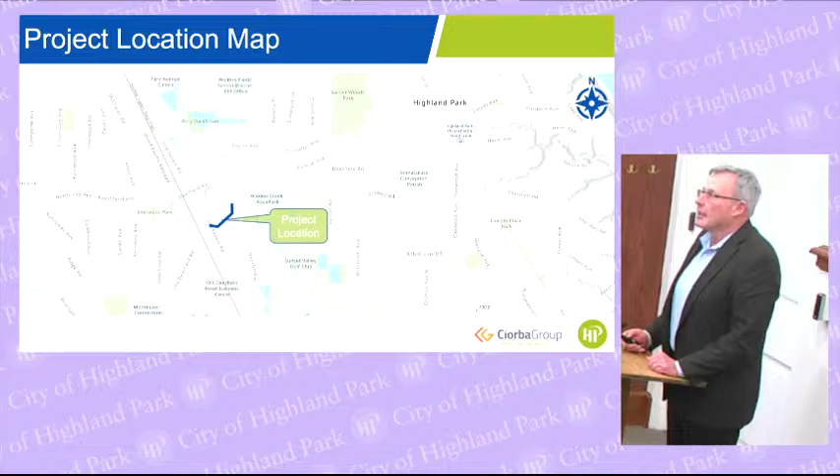As far as the project history goes, the project is located just south of Deerfield Road, or Central, depending on how you want to look at that, in Highland Park. Here's an aerial view of it, you can see what it looks like. It's a very basic bridge in this form.

The bridge itself is almost as old as I am — I'm a year older — but it was built in 1964, a reinforced concrete bridge, and it's listed as historically eligible. The city of Highland Park did not consider it to be eligible, but IDOT did say it was historically eligible. We had to go through a process called a historical analysis, known as Section 106, what IDOT calls it. We passed through all of that, and there were certain commitments made if a new bridge was constructed. There's a memorandum of agreement that was signed by the city of Highland Park, and now we're waiting for the FHWA and IDOT to sign that agreement as well.

There's nothing that's going to stop the agreement from being signed, but these were certain commitments that were made if we tore down this bridge and put up a new bridge.

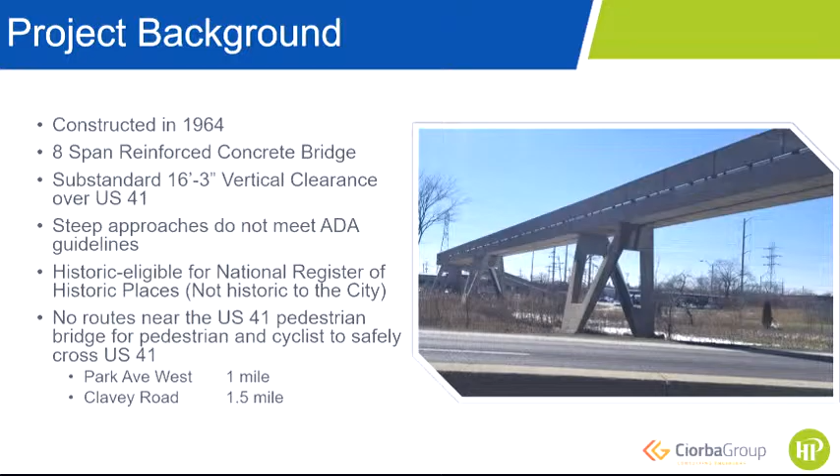There's no safe cycling or pedestrian crossing over US 41, though that depends on the user. As shown on the previous slide, Deerfield has no sidewalks, so no one can cross there. The closest crossing to the north is Park Avenue West, a mile away, and it has sidewalks, but depending on the maturity of the cyclist, it may not be desirable.

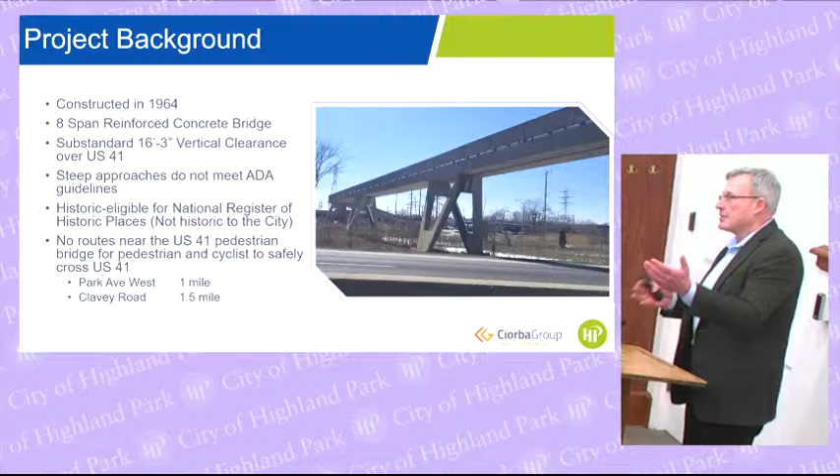Then you have Clavey Road, 1.5 miles to the south, which has sidewalks. With the recent Clavey Road project, east of that location there's now a multi-use path on the south side, but again, it's 1.5 miles from this location.

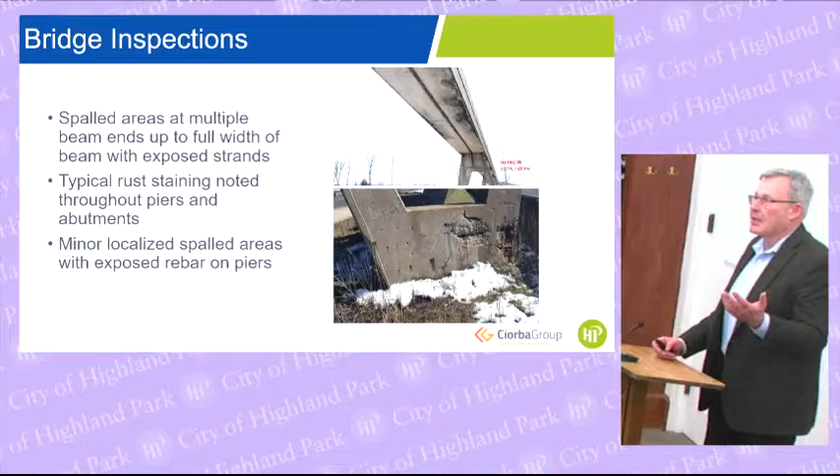The bridge itself is inspected by Ciorba Group every 2 years. The bridge deck is in the worst condition of anything. The substructure, the piers and abutments shown in that bottom picture, looks terrible, but that's actually cosmetic. When we say minor localized spall areas and exposed rebar on the piers, we mean it's minor—it can take the beating.

This portion is in the worst condition of the bridge. It's really narrow, and you can see these drains in the middle that are a maintenance nightmare—they pop up, they fail, and could be an ankle twist hazard. The drainage system is failing in a lot of locations, so water ponds there. It's really narrow and uninviting, and as a cyclist taking my bike over this, it's kind of scary.

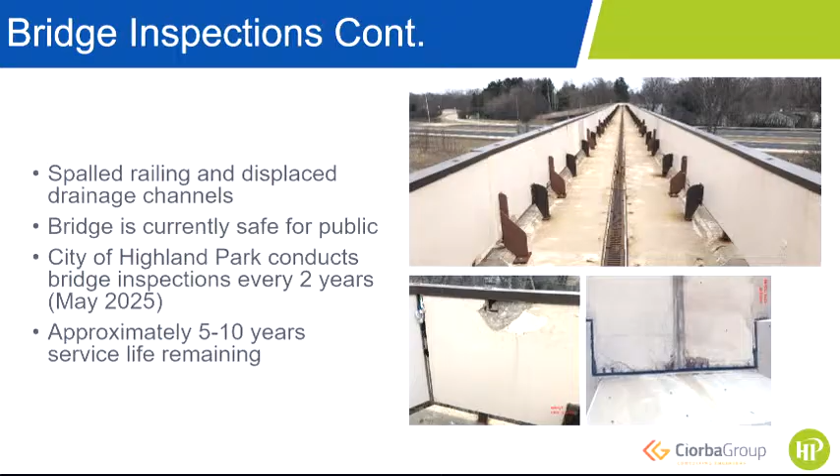We inspect this bridge every 2 years, and the last inspection was in May of last year, so it was recent. If nothing more is done—no maintenance, no repairs—we estimate the bridge could last about 5 to 10 years. It depends on what happens with the portion over US 41. If things start to spall and fall, there's potential for debris to fall on cars, so we might need emergency netting or even have to take the bridge down. But the estimate is 5 to 10 years.

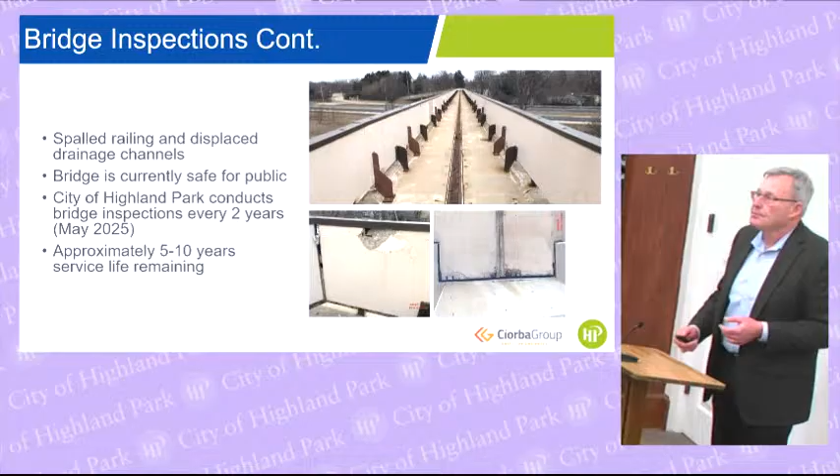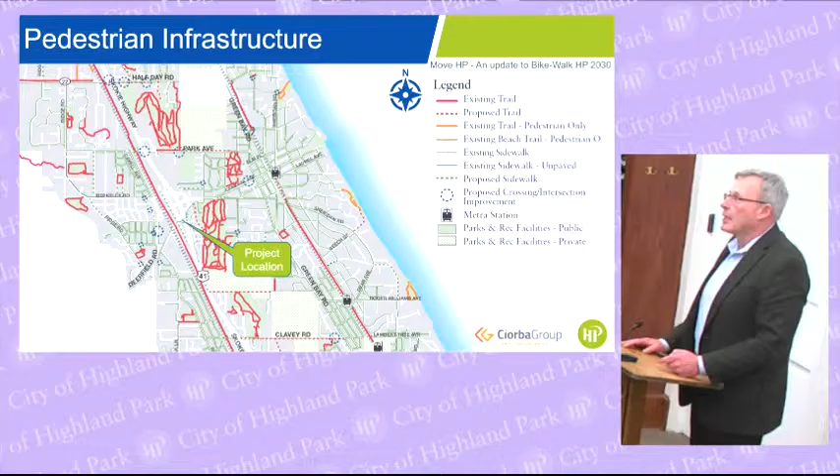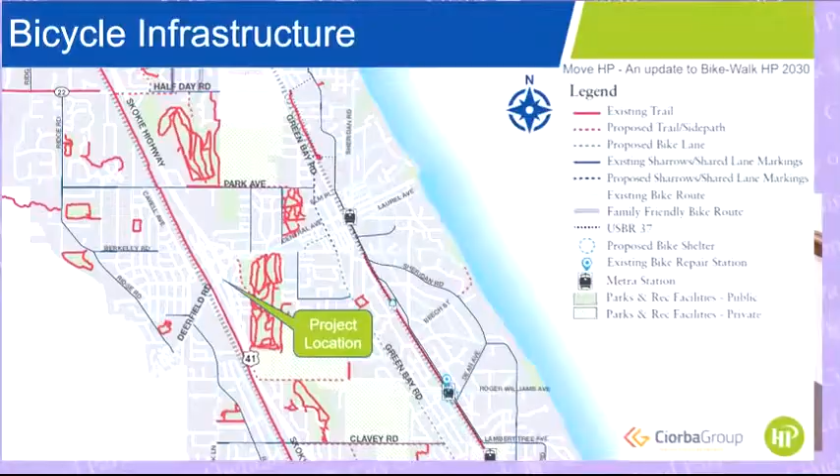Looking bigger at the infrastructure, you can see all the existing and proposed trails for pedestrians, including the bridge over US 41 providing pedestrian access. For bicycles, there's really nothing there. Clavey Road shows a dash, which has actually been built now—the trail on the south side of Clavey was constructed a couple years ago with the Clavey Road project. So there's really not a lot of connectivity on each side of 41 for bicyclists.

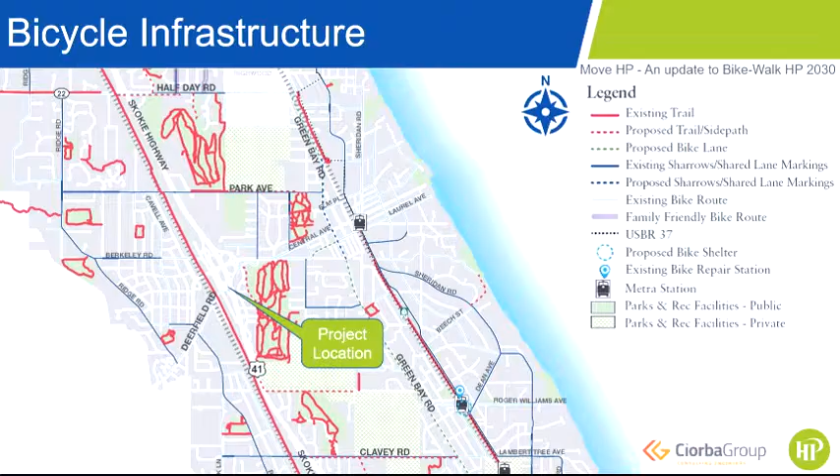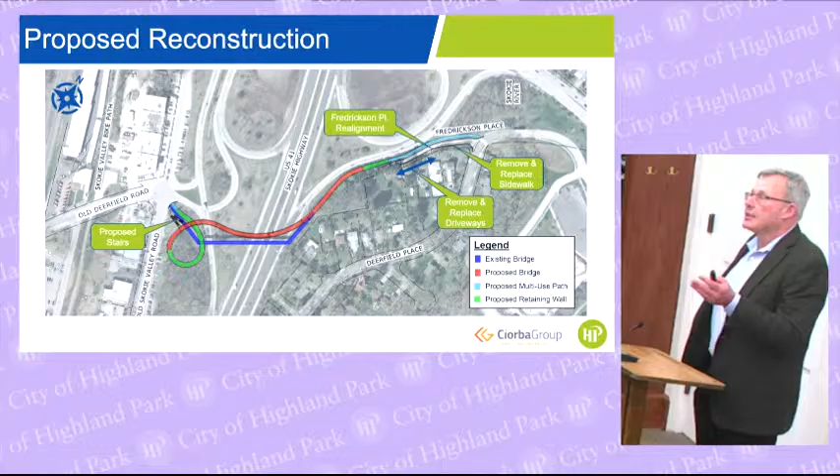As far as improvements, when we were asked what it would take to replace this bridge, here's what we came up with geometrically, which has been approved by IDOT. The bridge involves a loop ramp and a bridge structure over US 41, along with some MSE retaining walls and a touchdown at Frederickson Place. There would be a proposed sidewalk or stairs near Skokie Valley Road on the west side, and we'd also need to work with property owners on the east side because of the trail coming down in front of their house.

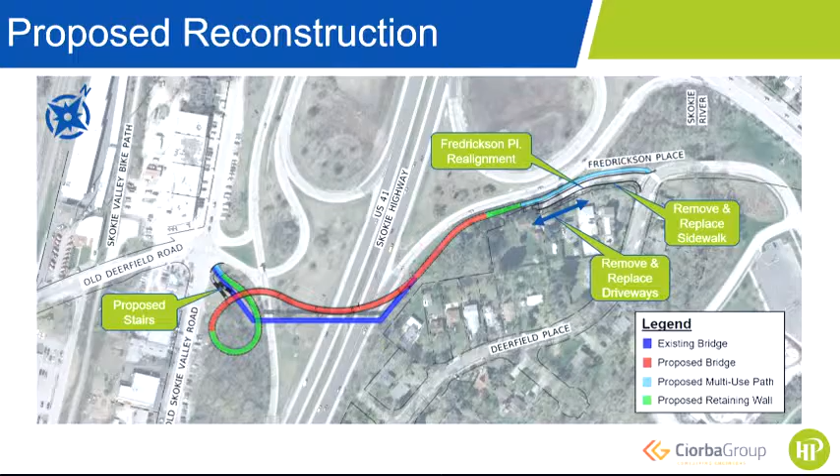The geometry is so complex because the original bridge was built very steep—a 12+% slope going up. Current standards require meeting the American Disability Accessibility Guidelines, which cannot exceed 5%, so the loop ramp and long ramp down help achieve that. Additionally, the current structure is vertically constrained over US 41 at 16 feet 3 inches, while IDOT's guidelines require 17 feet 3 inches. So not only do we have to achieve a 5% or lower slope, we also have to raise the bridge a foot higher than existing, which complicates the geometry further.

This is a real quick rendering we did to give you an impression of what it would look like on this end. Again, there would be retaining walls on the outside, and the retaining walls could be aesthetically pleasing.

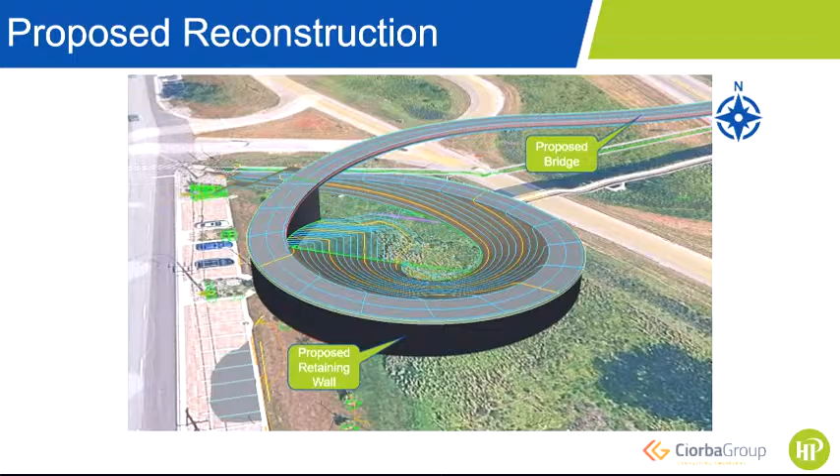As you can see, there's a lot of retaining wall options available. The inside, in order to save costs, we were going to grade it down, and it can be landscaped in that area for the users to see. And again, the bridge goes over US 41.

You can see here that the existing bridge is 6 feet — it's really narrow. But we're talking about this new bridge being 14 feet wide, which provides adequate space for bicyclists and pedestrians to commingle.

And then as I mentioned, there's the loop ramp. As an engineer, I never like designing anything to the minimum or the maximum because there are construction tolerances. That's why we designed this to 4.9%, not the 5% max I mentioned earlier.

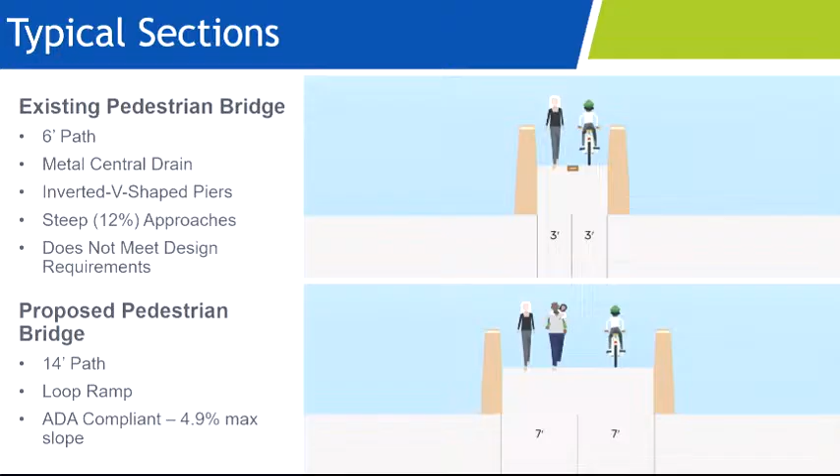We were also asked to take a look at what it would take to rehabilitate the existing structure. So we took a look at it and did a life cycle cost analysis of the bridge itself — what it would take to repair the bridge deck, which is really narrow, and where the drains are failing. We concluded it's best to just take the whole bridge deck off.

We'd construct a whole new bridge deck, and then the piers and abutments — the cosmetic work I told you about — we would repair those. So that's what it shows right here: we would put a new 10-foot wide bridge deck on there, no longer 6 feet. We could accommodate a 10-foot wide bridge deck and put on IDOT standard bicycle railing.

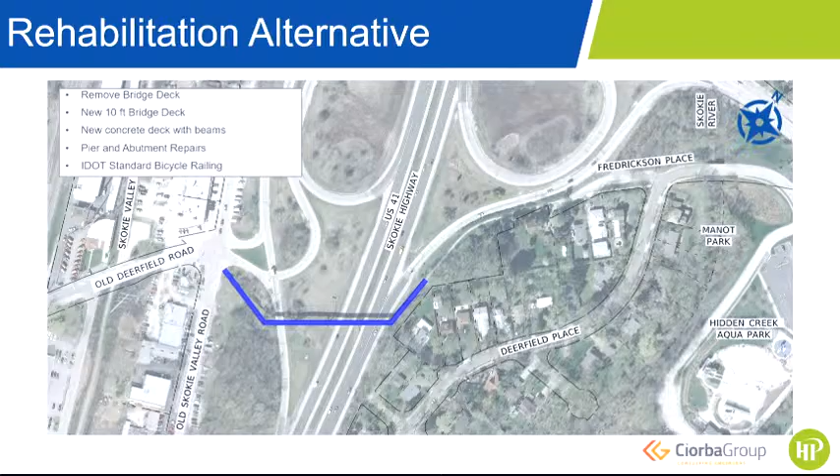The funding for that would have to be 100% by the city for the rehab, because of the grant funding — the ITEP grant funding. There's $2 million that the city was awarded for that. Because the bridge would still not be ADA compliant, the federal funding would be disallowed. And that federal funding expires on November 30th of this year.

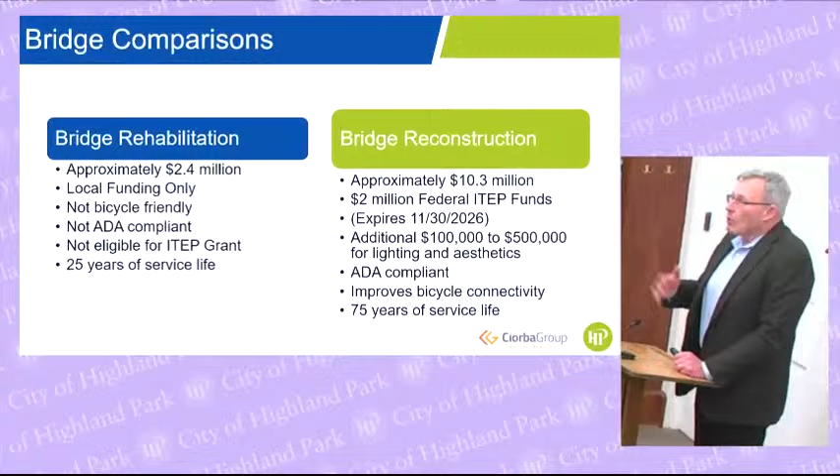The old bridge rehabilitation would not be bicycle friendly and would also not meet ADA guidelines. If we were to do that, about 25 years later you'd have to go back and revisit the bridge, probably do more inspections and repairs on the piers, abutments, and the bridge deck. By then the bridge deck will need something done to it — so about 25 years, you'd have to take a look at that.

Whereas on the other side, the bridge reconstruction is going to be ADA compliant, provide that bicycle connectivity, and offer 75 years of service life — but at a cost of $10.3 million, of which $2 million will be offset by the ITEP funding grant.

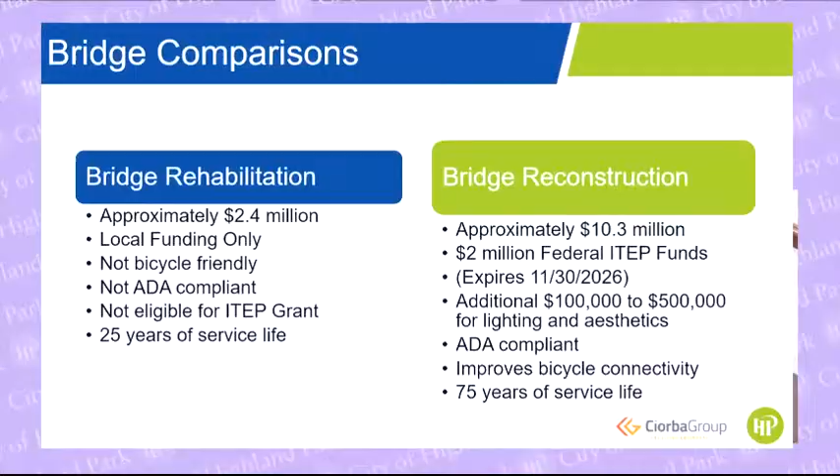The other thing is, I know the city was wanting to do some aesthetics with this because you wanted it to be a gateway, have Highland Park branding on it and things like that. So depending on how little or how much you want to do, the architect I was working with said it's a palette anywhere from $100,000 to maybe $500,000, which was the estimate we came up with.

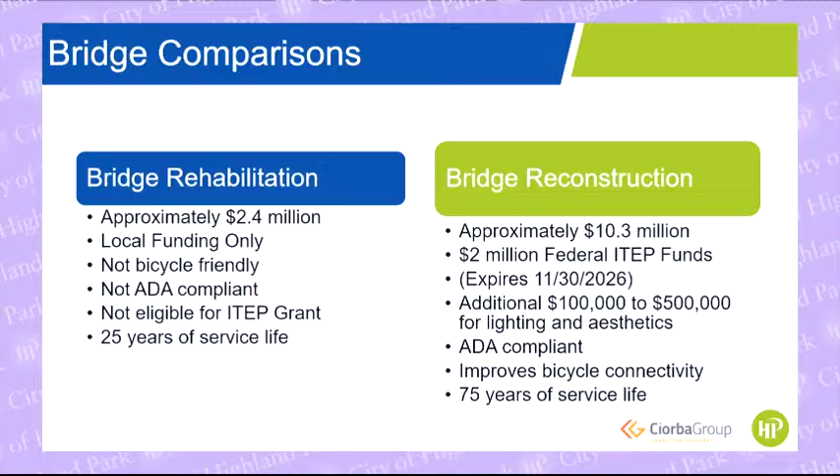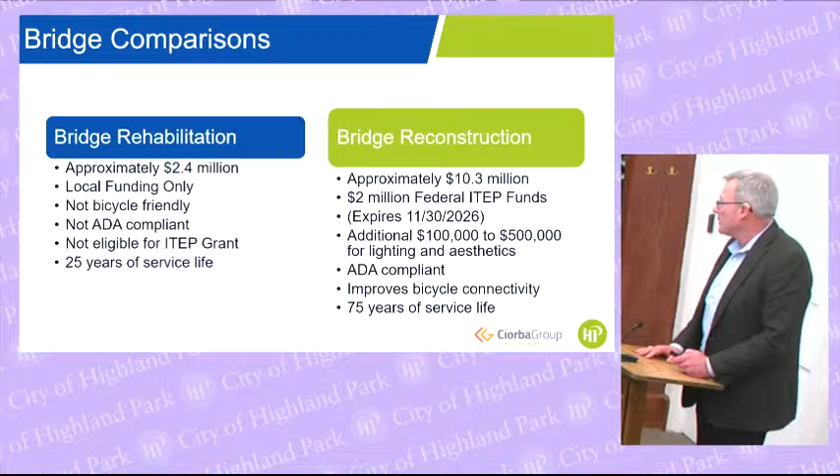The work that the architect has, because of not knowing which way the city was going to go, we have not been working on that portion. I know that if we did go this way, there would be a lot of work we'd have to do with the city as far as selecting palettes, plants, and aesthetics. We can do that if necessary.

So that's the entire presentation. I leave it to any questions that you have.

One question I had, if you could go back in terms of the 10.3 cost of construction for the new one, would that be in addition to the 2 million for engineering we have from ITEP, or would the ITEP be included in that 10.3? The 10.3 is the total cost, so your 2 million would offset that, making the city's cost 8.3.

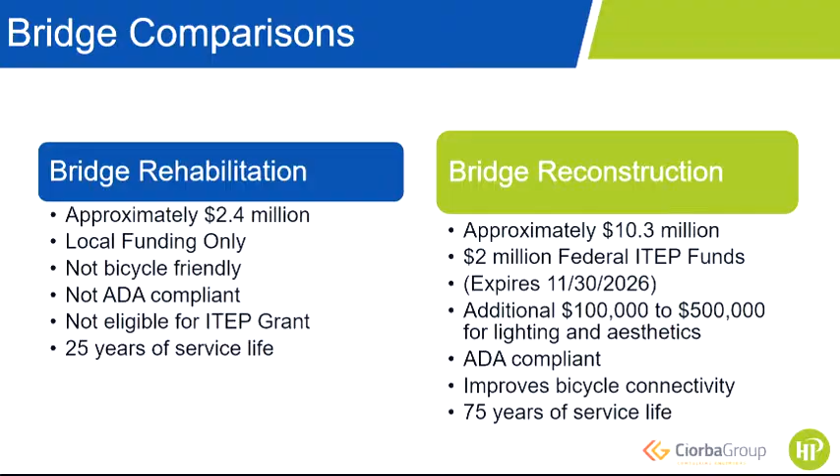Are you aware of state funds available in addition to federal funds for the bridge? We've been chasing any grant available ever since, with your previous city engineer Manny Gomez. We chased after 3 or 4 other grants, and some of them we came close on. Others, I hate to say this, but Highland Park's average income puts us past certain thresholds on some of these grants, which hurts our eligibility. Unfortunately, up to this point, we've not been able to secure additional funding.

So in essence, there's a potential for an $8.3 million deficit on the reconstruction versus the 2.4 for the rehabilitation. Okay, thanks. Annette, I know you had something you wanted to ask.

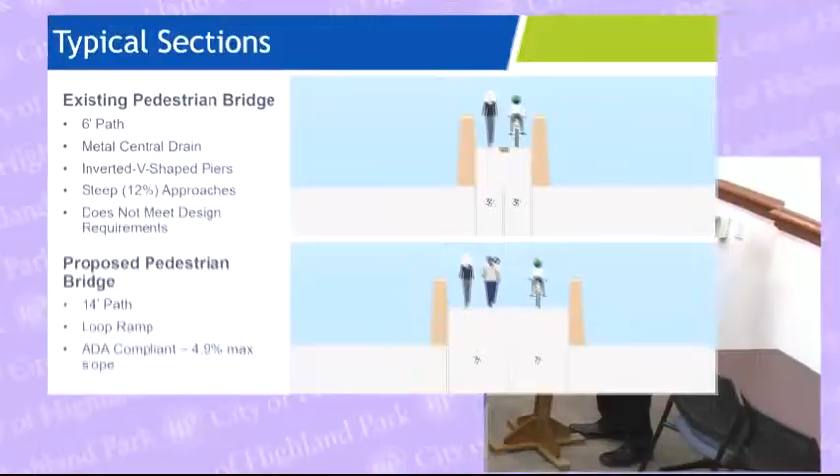So a couple quick questions. The 7 feet on either side, if you were doing the new bridge - what do you mean 7 feet? Oh, it's 14 feet wide in the proposed pedestrian path. The new bridge for reconstruction would be 14 feet wide. Under the rehab option, we can only do 10 feet.

Is that for ADA compliance or federal requirements? The 14 feet, because the multi-use path is for bicycles and pedestrians, that's what garners the need for the additional width. That's what I'm asking - if we could get it down to 12 feet, would it still be compliant and cost less? Yes, but the other reason for the additional width is the loop of the ramp. Because of that tight ramp, we're very limited with the footprint available with the two roads there. We had to make that curve really tight, and in order to get away with a curve that tight, we had to make things a little wider.

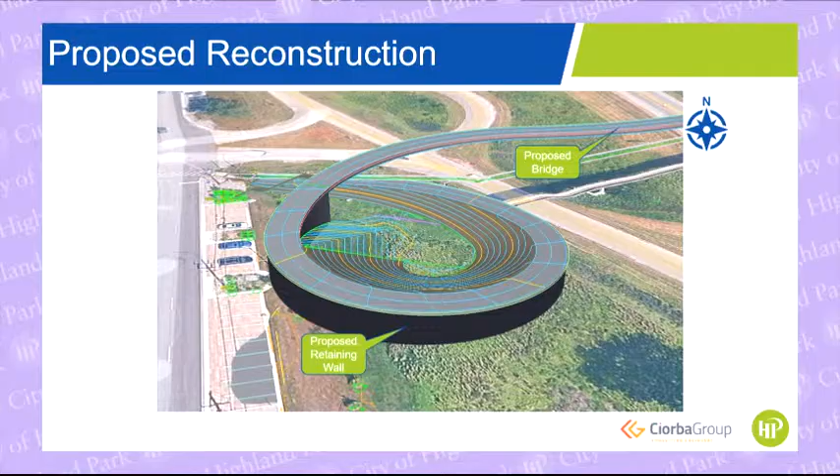So I asked that question as well - when I first saw this, I thought, can we go down to 12 feet? Because 10 feet is your normal multi-use path, so if that's 10 plus 2 and 2 for shoulder, can we go 12? And again, like I said, it's the loop ramp itself.

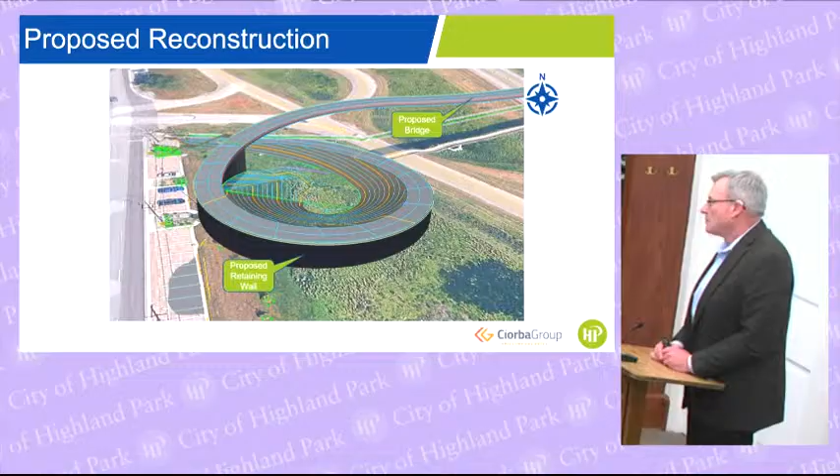Okay, so that was one question about the new bridge, and I already got the answer - it wouldn't qualify for federal dollars. Oh, that was what I was going to ask - if we took off just the top of the bridge, but not the pilings, would that qualify as a new bridge so we could still use that toward federal dollars?

If you took off the top, it's like a new bridge - is there any way that would qualify for the 2 million grant? Because of the no ADA compliance, right, and it also isn't high enough for new IDOT regulations. So because it can't comply with certain federal mandates, it doesn't qualify. The biggest thing is the ADA compliance.

Okay, great, and then I had one more. So on the reconstructed bridge, I know it's not ADA compliant and not multi-use friendly from the standards we'd optimally love to have. But considering I've ridden on that 6-foot wide thing, I'm in fear for my life, but I do it because I have to get to the other side. If it's 10 feet wide, that would be better - could you take bikes there? It just wouldn't be a recognized user-friendly bike path, or do we have to ban bikes on it? You are correct about that. Now, I want to clarify, you said reconstruct, but you meant the rehabilitation.

We'll just take the deck off, okay. I just want to make that clear.

So with this option, the steep ramps would still be there, the 12% ramps. Because of that, it would not be ADA compliant, so the ITEP grant funding still wouldn't be used. As a cyclist, I would rather go over something like that than what I've gone over on the existing bridge.

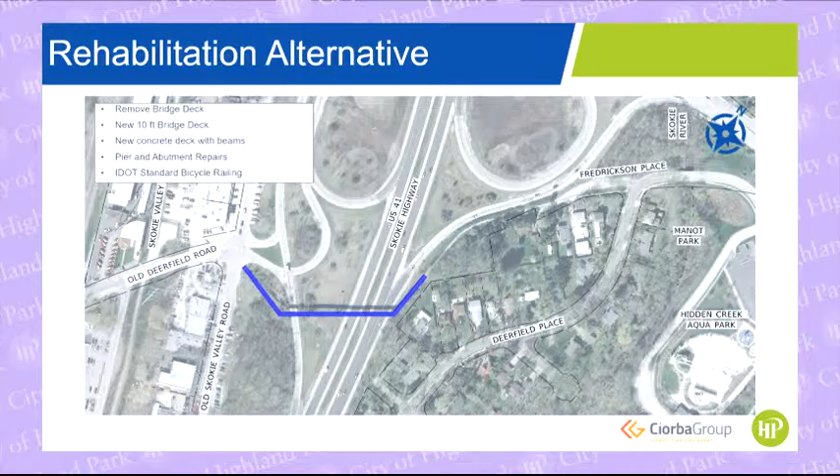But again, like I said, for that, it's the cost of the $2 million grant - you wouldn't be able to use it.

What are the maintenance costs if we redid it with the 75-year rehab bridge? Do you know what the annual maintenance costs would be? The lifespan for this bridge would be 75 years. You would still have to go back and do maintenance every 10 to 20 years, depending on what happens.

Again, things happen - you're going to have rust stains or things come loose and have to get tightened. Eventually, because of salt intrusion, rebar could start popping, and then you have to fix that concrete. But I'm not going to lie to you, you're not going to walk away and not do anything for 75 years. You definitely have to do some maintenance.

Given that the current bridge is 62 years old, how come you're saying 25 years if we fix it? I understand it's not great, but it's not collapsing, so why wouldn't it also have close to 80 years of service life, or 75 years of service?

Well, because of the piers themselves - they are already 62 years old, and because of that they are showing those cosmetic issues I was telling you about. We'll repair those, but eventually they will exceed their life expectancy of 75 years. You could potentially get 100 years out of them with really good maintenance, but I didn't want to over-forecast and tell you 50 years when it's more like 25.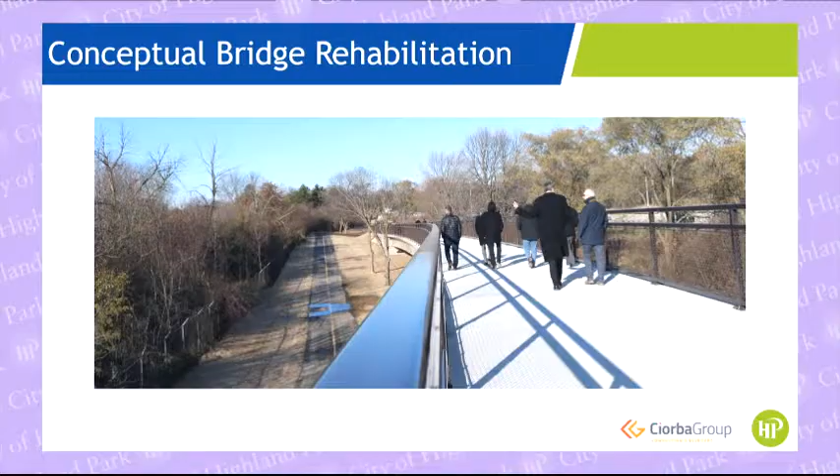And what kind of concrete - would it be like a smooth concrete or rough concrete? It would be a textured concrete, because you don't want it to be a troweled smooth concrete like a basement floor, because it would be slick. It's like sidewalks - we brush it, a broom finish.

John, do you have a question? Yeah, it's a really important bridge relative to the connectivity of the city, particularly with potentially increased population over there, and as a gateway to downtown. I think the signage is its own thing, but there's an opportunity to sort of refresh the way the town looks as people are driving into it.

When you look at the dollars, it's obviously a significant investment today, but when you look at the incremental dollars of needing to spend every 25 years, what you'll need to spend in 25 years to replace it anyways, you're actually going to end up spending more. So it's a tough pill to swallow today, but you're theoretically more prudently utilizing those resources now versus costing yourself more later.

So the question is, and this is to Christie in the back row, do we have an estimate of what this kind of cost would be, amortized over 15 or 30 years, and what that cost is annually? That'll come on the 30th, along with the net figure. Yeah, so that conversation and this project and the totality of the complete capital plan will come on the 30th.

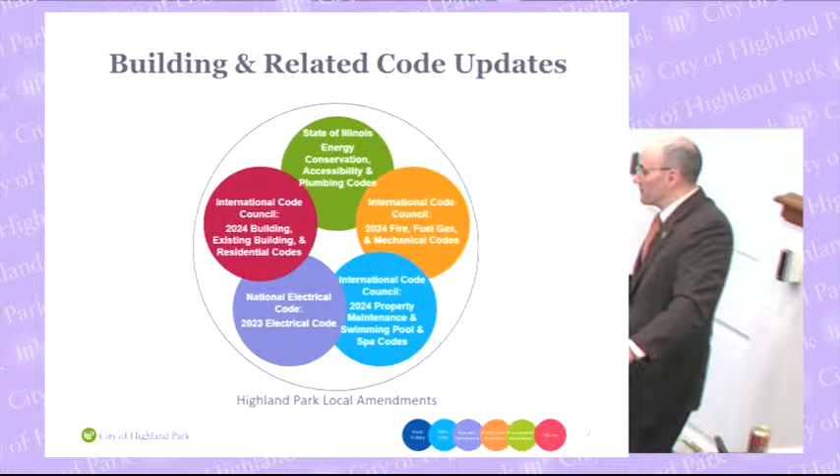I want the council to understand the collection of codes, at a high level, that are involved in development and construction. We have codes mandated to us from the state, including the Energy Conservation Code, the Accessibility Code, and the Plumbing Code. Then we have the ICC, or International Code Council's code families, which are adopted by reference by localities throughout the United States and internationally. We currently use the 2018 code family with local amendments.

This update proposes to upgrade our building code to the 2024 version, the latest available version of the International Code Council's model codes. This includes building, existing building, and residential codes, fire, fuel gas, and mechanical codes, all part of that International Code Council code family, as well as property maintenance, swimming pool, and spa codes.

We also recommend adopting the National Electrical Code. We currently have the 2017 version; this recommends 2023, essentially bringing us up to date with the latest materials and methods used for construction.

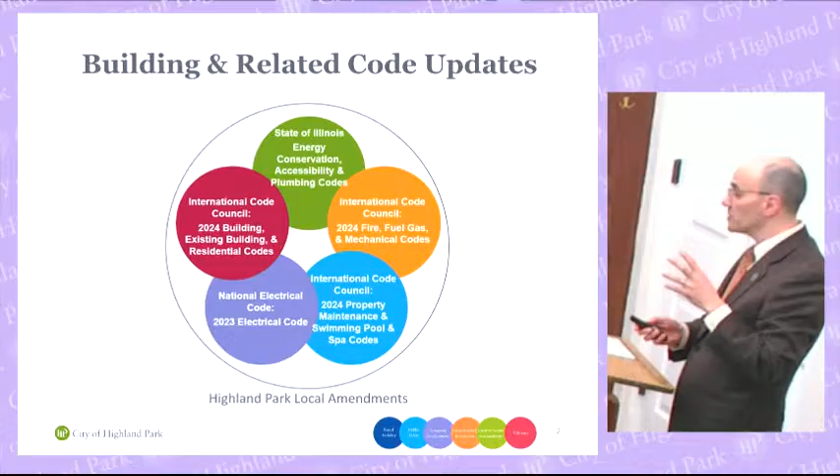So let's talk about how these codes come about. The state has its own code development process, and the International Code Council has a process as well. The building code update project the city is undertaking consists of two main projects. One is updating from the ICC's 2018 code cycle to its latest, the 2024 cycle, often referred to as a code family because of the number of codes involved.

The second part of the project is assessing the Illinois Stretch Energy Code. The 2023 version has been available since January 1st, 2025. We had a conversation last year about that, and the council asked some important policy questions. As a city, we obtained a grant to assess the Illinois Stretch Energy Code to advise the council on whether it makes sense to adopt it and what trajectory it takes us on toward our goal of achieving net zero.

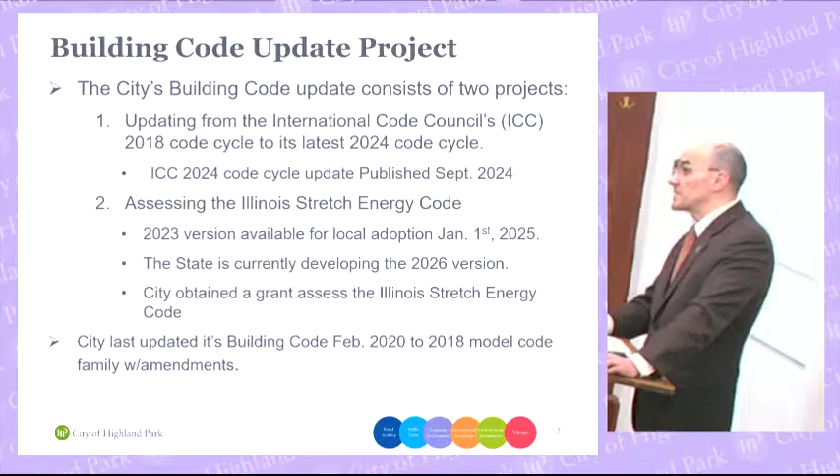I want to thank Erin Jason and her Sustainability Division team for obtaining this grant; it's instrumental to the work we'll do this year to assess that and come back with important information to help you decide. That doesn't have to happen before or concurrently with number one — number two is a separate project, and number one is self-contained; you do not need to do number two. The city last updated its building code in February 2020 to the 2018 model codes with amendments.

Now, talking about the ICC model code development process: the International Code Council uses a three-stage process. It's a three-year process overall, done on a rolling basis — they issue a code and then begin developing the next set. They start with code development committees, including stakeholders from building industries, government, academia, design professionals, insurance, builders, contractors, manufacturers, distributors, and other development professionals all at the table.

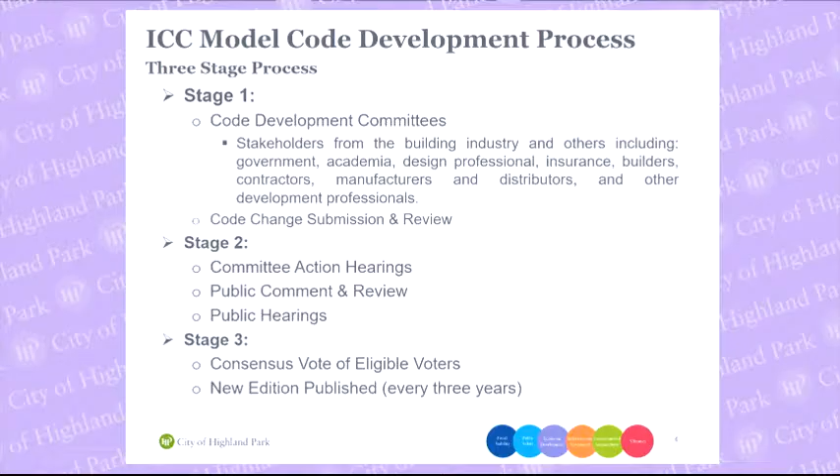They examine and go through a code change submission and review process — asking what do you want to change. Every three years, things change in construction, the materials and methods used to achieve building safety goals for everyone, so they review changes. They also look at what didn't work well and consider changing it, as we all do with our codes at all levels.

This concerted effort then moves to stage two, committee action hearings, where they debate proposals — what about this stakeholder group, what about that one, if you do this it won't work, if you do that it costs too much. Those conversations happen, then it goes to public comment and review to see what the public has to say; interesting things often come up. That's taken into consideration, and then they have public hearings. Stage three then goes to a consensus vote by eligible voters.

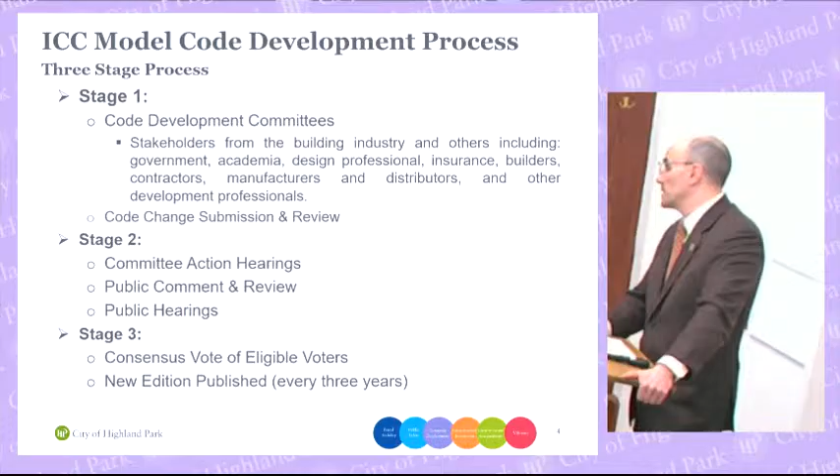Some council members may not recall, but I'll just refresh the council's general collective memory from my presentation last year. In 2019, we did participate in the Code Council vote with regard to encouraging the International Code Council to develop a base set of model codes that will be on a glide path to net zero by 2050.

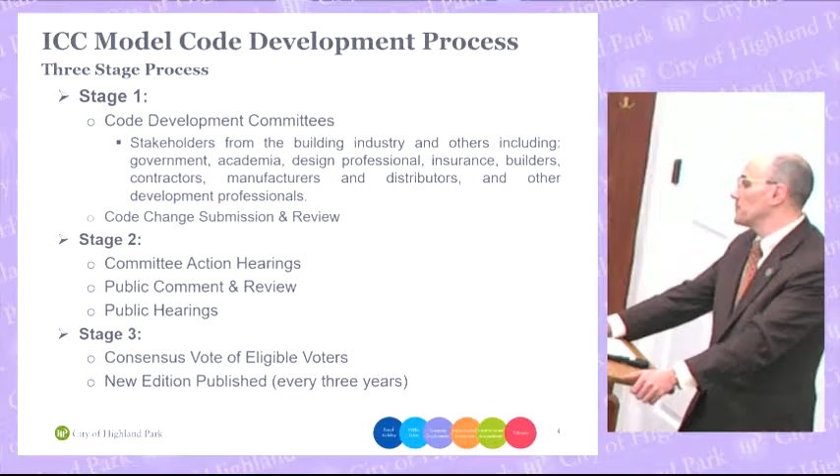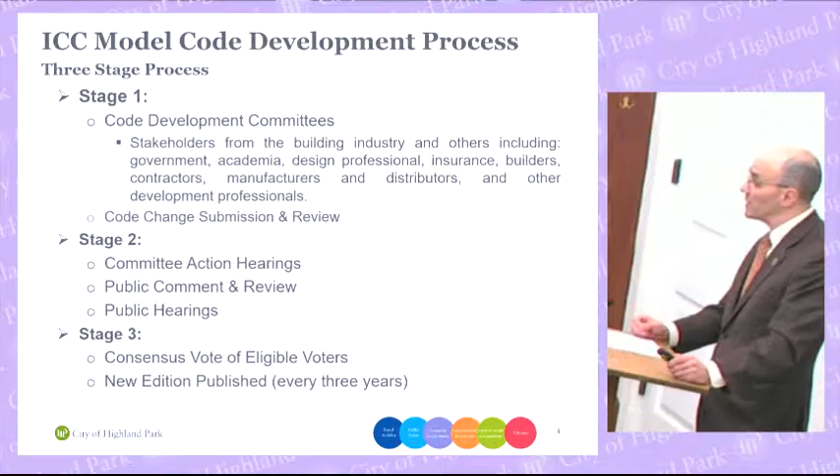Just to give you a local example of how we had participated at one point in time, a new edition is published every 3 years. This 3-stage process ends, and then those become available in print, electronic form, and training sessions start to occur from there. There's also code commentary that follows, where the Code Council further explains things where there are questions that they find through training of folks, bringing them up to speed.

So to step back, what are we doing? The city's building code adopts by reference, with various amendments, certain state and international model codes. Specifically, what we have right now is the 2024 Illinois Energy Conservation Code, promulgated by the state of Illinois, which became effective this year - actually at the end of last year, available I believe at the end of November. We do that by reference, so there's nothing this council has to do. In 2020, we made sure all of our codes did by reference the state codes that are required, so the council doesn't need to worry about adopting amendments quickly.

We also have by reference the 2018 Accessibility Code, also an Illinois state code, the latest edition of that. And lastly, the 2014 State Plumbing Code with local amendments, sparingly applied.

We also look at, in terms of by reference, where we would like to go is the 2023 National Electrical Code. Right now we're on 2017. So we adopt by reference that code, and we need to change that to 2023 - that's our recommendation.

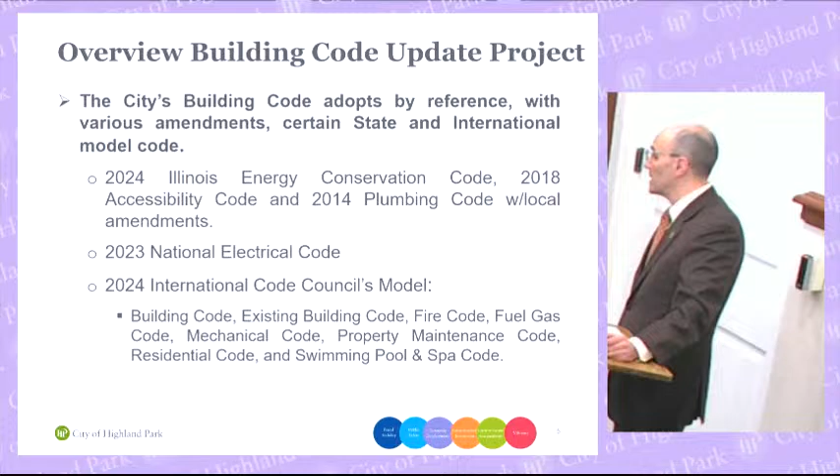So what did this project accomplish? It accomplished a number of code improvements. It aligns more closely with model building codes, making them more accessible to users. This is an ongoing initiative that Council set forth a while ago during our last code update, and we further that alignment through this code, looking at the 2024 codes and asking, why are we doing this differently? Why not align? Why is that a better way to approach it?

Well, because there's a common set of training and experience that design professionals and staff have relative to codes. If you have particular code amendments in your locality, those are sometimes the most difficult to make sure design professionals and staff know as well. So that alignment helps. Also, the Code Council does a very good job developing code, so sometimes they got it better than we had it or would have it - and therefore, let's adopt the model code.

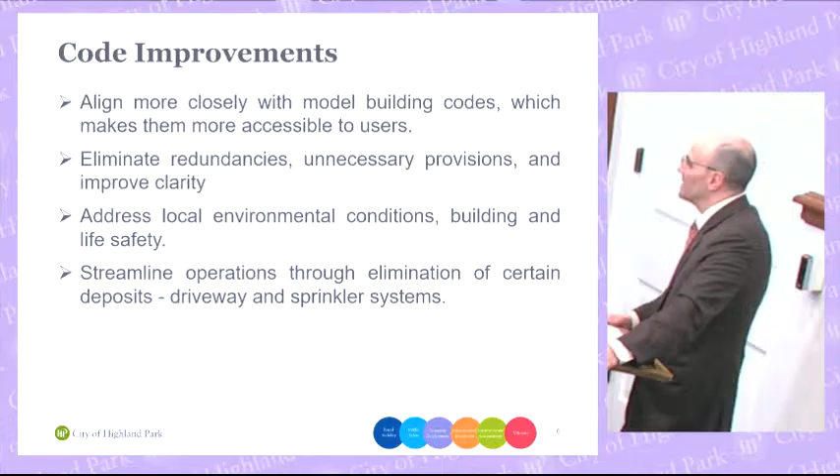So often what happens is there are local code amendments that ultimately eventually get adopted by the ICC in future code cycles - things that just didn't make it in committee, but that governmental regulators really do value and want to have. Those are some amendments that you adopt locally. We eliminated redundancies, unnecessary provisions, and improved clarity.

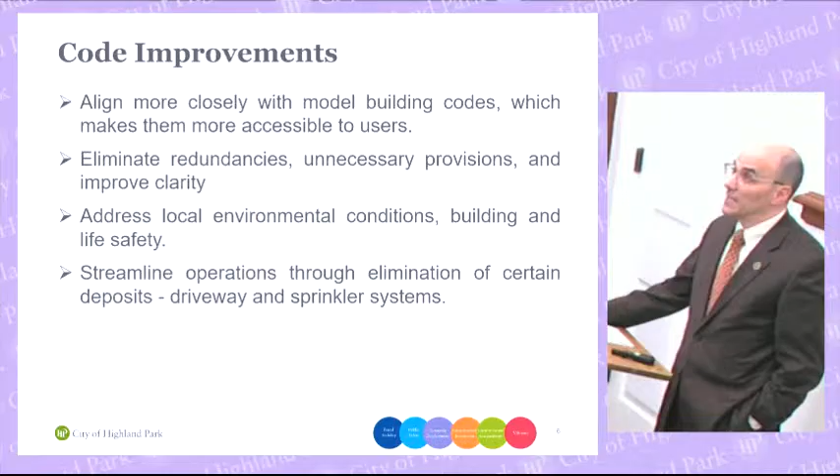The code improvements address local environmental conditions, building and life safety, and streamline operations through the elimination of certain deposits. Although these deposits are related to permits, they actually exist in different parts of our code, Chapter 93 in this case, with regard to driveway and sprinkler systems. Working with Public Works Director Bannon, we reviewed the deposits that we collect and determined that those two deposits don't add value to the process or the outcomes, and instead just create work.

There's no value to the customer, and the city has not utilized them, nor do they really represent a significant enough value at $250 to incentivize anything. So you could say, well, what would you do, and why do we collect, and what would you do if they don't do the driveway or sprinkler system properly?

Well, these things exist in our right-of-way, and so we own the right-of-way. We know where the person lives, it's the house right there. And so we feel confident that without a deposit, we could use our administrative hearing system to make sure that things are done properly with regard to their driveways and sprinkler systems. Thus we eliminate an administrative burden that the collection and refund of deposits creates, and also the absolute zero value it's seen by customers.

So it's like the 8th grade punishment assignment you're saying? I didn't do anything, what do I need to give you this money so you can give it back? Well, yeah. Okay, let's not do that.

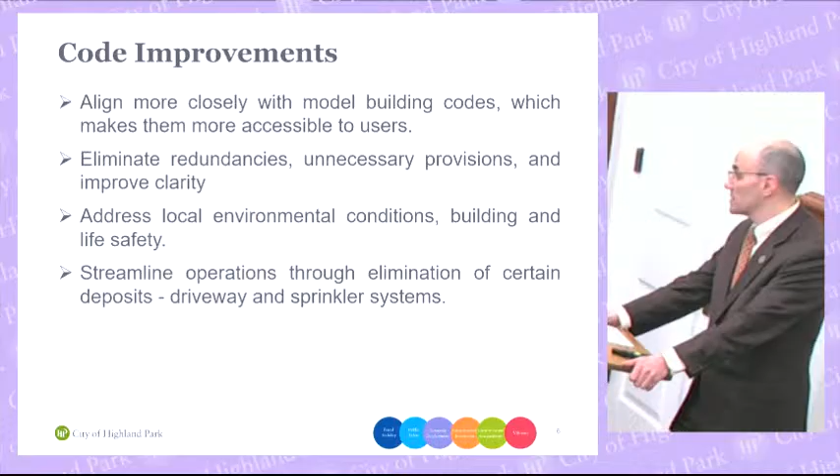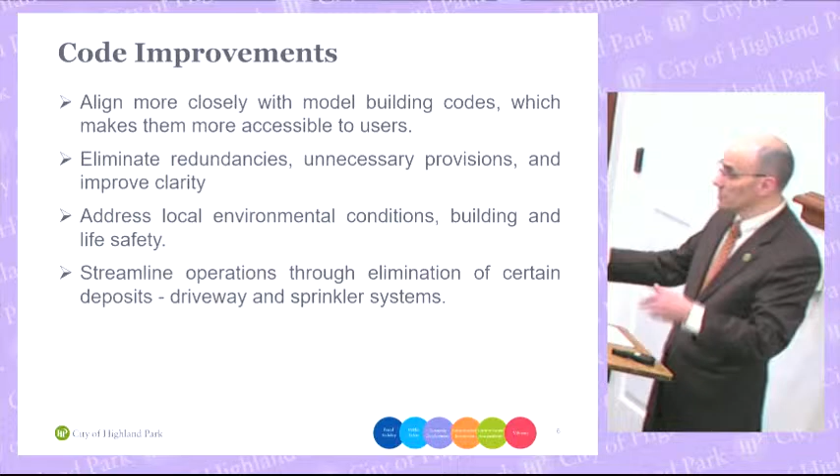Now, we do keep, and we intend to keep, street openings and water connections. Those happen in the right-of-way, out in the street. So someone digs up the street, and let's say they don't do what they're supposed to do, Public Works would need to jump in potentially and fix that hole. Now, we could still fine folks and all that, but we want to be able to act quickly, and we want to have some money to do it with. And so those two we're going to keep, because that has to do with our water systems and our streets, so that we don't have holes in our streets and the water system is done properly.

Okay, so let's get to the key local amendments.

With regard to private septic systems, our proposed amendments prohibit any expansion or new private sewage systems regardless of lot size, consistent with past practice. Public Works and Community Development recommend against septic systems. They are not something that you want to have in your city. Those that exist can remain and be maintained, but we don't want any expansion or new ones.

Amendments regarding prohibited locations for toilet facilities. This gets down a little bit in the weeds, but it gives you an example of how we try to fill gaps where we see them. We have the state plumbing code, but it covers pretty much everything except one provision in the International Building Code, the Model Code, that's not addressed in the state plumbing code. So we're going to maintain that provision so that we essentially close a loophole in the state law. Eventually that would be rectified through the state's enabling update process, but it hasn't yet, and so we recommend that be included.

Regarding backflow preventers on boiler systems, backflow preventers are very important. We operate a water system, and they're important whether or not you operate one, but we have particularly acute interest in this as we are a water purveyor. This requires backflow preventers on all boiler systems used for heating a structure. It's important to protecting the water supply; you don't want the water to become contaminated, and thus the backflow prevention prevents that.

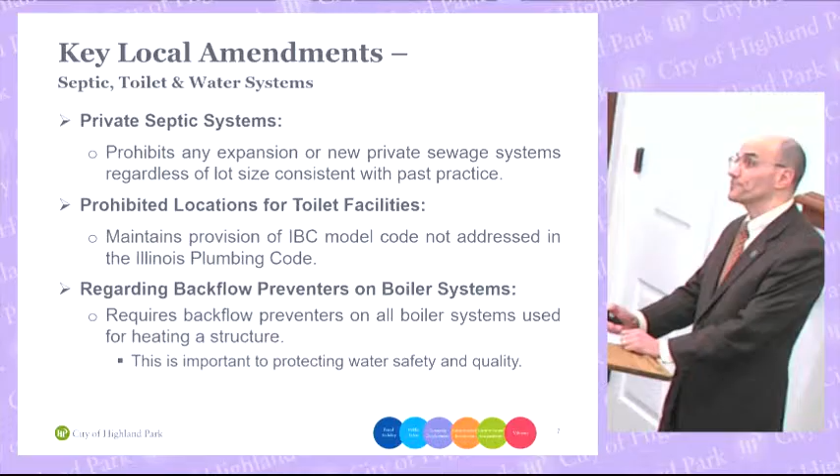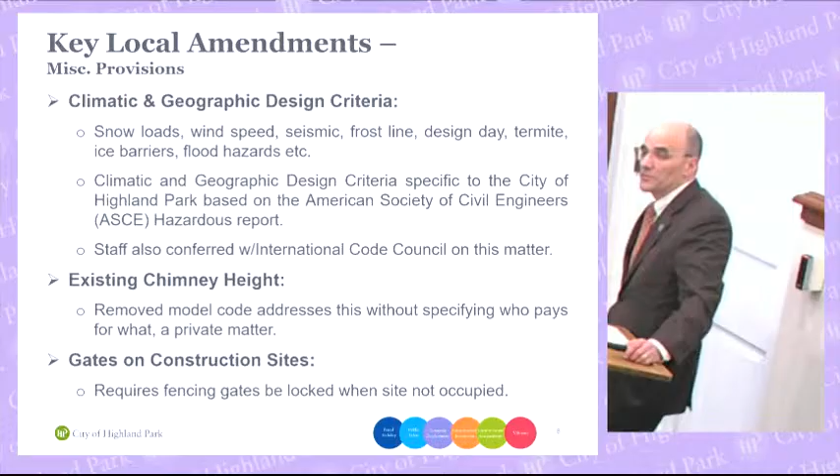There are several miscellaneous provisions, as I refer to them here, having to do with climatic and geographic design criteria. This affects all municipalities, and you have to pick your path depending on where you're located and what these things need to be for your community. So you have things like snow loads, wind speed, frost line, design day—meaning for your heating systems, what is the situation outside that you're designing for—termite infestation, ice barriers, and flood hazards. As we know, we have lots of flood zones in our community.

So what we did is we updated this to make sure it reflects our community, and we based it on the American Society of Civil Engineers Hazards Report, which is per the ICC model code. We conferred with the International Code Council on this matter to make sure we got it right.

Existing chimney height, we removed this because the model code addresses this without specifying who pays for what, which is a private matter. So we had a local amendment that is essentially taken care of by our existing model codes that we'd be adopting, and there's no need to interject oneself in that.

Gates on construction sites. Now you're gonna say, boy, geez, really? Yeah, we need to make sure we're adding to the code that they be locked. So in 2020, we included that, yeah, you need to have those construction fences. We got over the fact of, well, do I need one or not? We just said all construction sites need them unless otherwise stated, so that the default was correct.

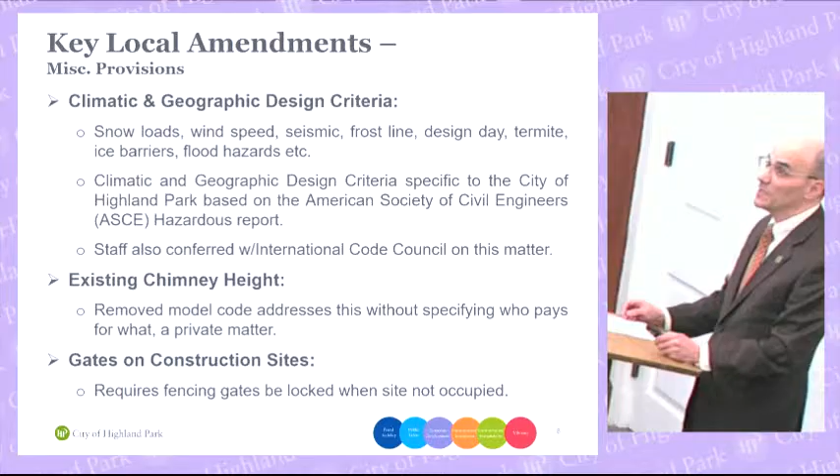Okay, vacant lot standards. So we've had a number of fires in our community from time to time, and unfortunately there's a loss of property, and God forbid life, but loss of property sometimes significant, that requires the demolition of a home.

And so we want to provide enough time for folks to make arrangements for what they're going to do after. This might seem like, well, don't they just want to rebuild? It's more complicated than that, and often involves a lot of planning and wrangling with your insurance company before you could just go ahead and build a new house.

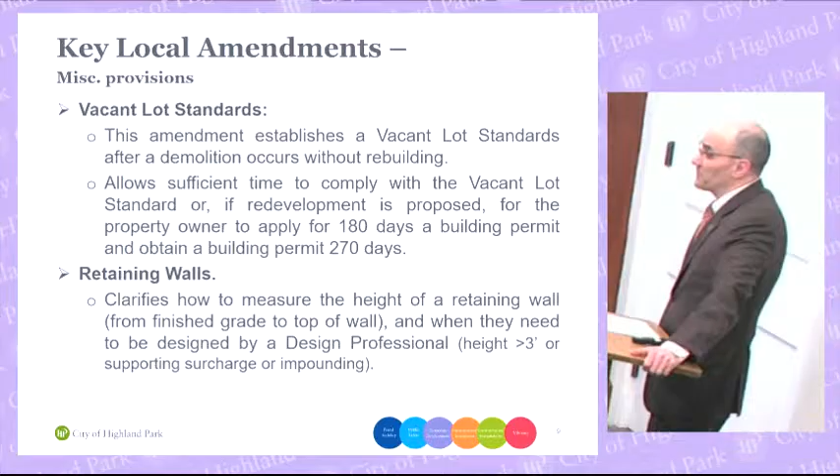Often folks don't have the means to just pop and do that. There's a lot of work to do, both in terms of who you're going to hire, and where the money's coming from - bank loans, etc. So what this does is it allows sufficient time to comply with the vacant lot standards.

Or if redevelopment is proposed, for the property owner to apply within 180 days - that should be in brackets - for a building permit and obtain one within 270. So why the 180 and the 270?

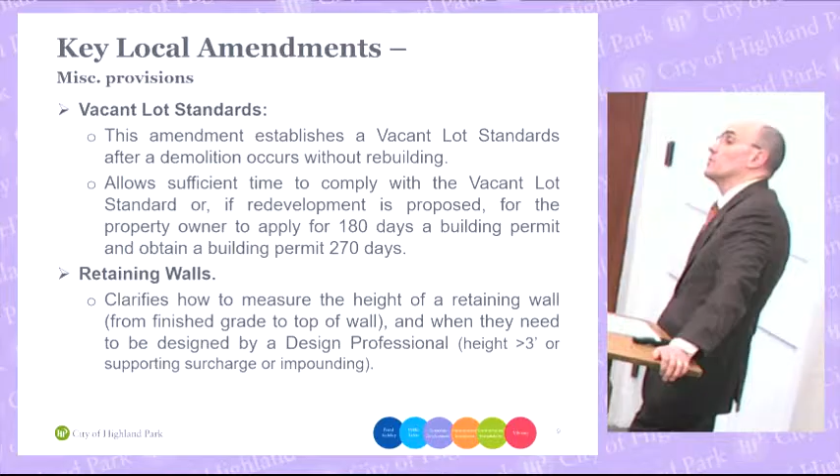180 days - believe me, after a big fire and a loss like that, those days go by fast. I've talked with folks, and we try to have as much empathy as we can while making sure the site's safe and that the community knows, hey, something's going to happen here, right?

So we go from, you need to knock down this home, to what are you going to do with this after you knock it down? So there are times where people say, listen, I'm going to raze the home, but I want to keep the foundation because I want to rebuild on that foundation. You could do that by zoning, but the question is when?

So this ties to, okay, we're with you, we understand, we don't want to make you incur more costs than you have to by removing the foundation and all that. You need to get us something in 180 days, okay - what are you going to do with this?

And then we give ourselves time to review those plans, because when somebody applies for a building permit, well, some are better than others, and we don't want to have a situation where we have to approve something in any amount of time that would be unwise. So this gives plenty of time for review and revisions from the customer, because we know that sometimes, depending on the team that they use, it could be more or less in terms of the number of revisions.

Having said that, we set this end date so that it's like, look, you supplied us a building permit, but these plans are not approvable. Well, you don't get to just leave the lot like that. After 270 days, we're like, that's it. It's a violation. You got to find a design professional to get this to meet the code. This isn't some secret game. The code is published. You can meet the code. You just haven't yet. So it gives belt and suspenders.

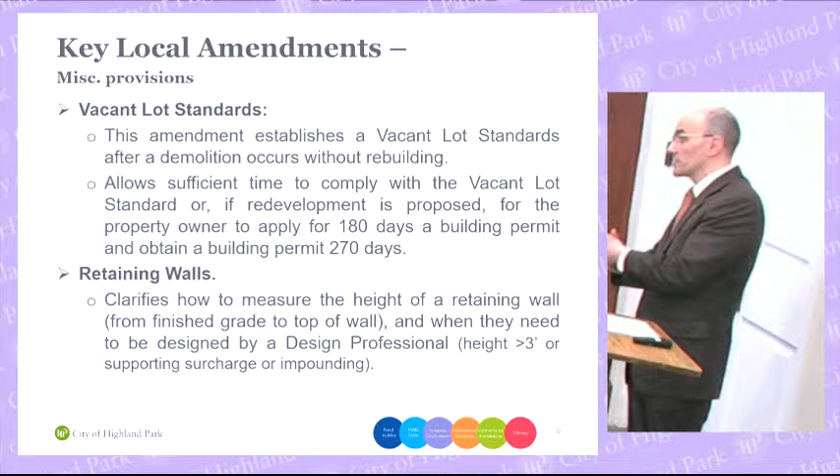So that clarified one thing, because this does get touchy with neighbors at times. And what we're trying to do here is small retaining walls aren't generally a problem. So you have little landscaping walls and things like that, not the things we're really worried about, right? But when they get higher than 3 feet, you need a design professional, and in certain circumstances where they're supporting a surcharge or impounding - so if there's some weight behind them, that this is actually holding back the earth as opposed to decorative with very light charge - you have the ability, we have the ability to require a professional to design that so that we don't have unfortunate collapses or other things that happen. People sometimes put their vehicles on driveways that are being retained by retaining walls. You see what I'm saying? That's a different kind of a wall than, I got a bunch of azaleas here, and it's not really a big deal. So, we clarified that.

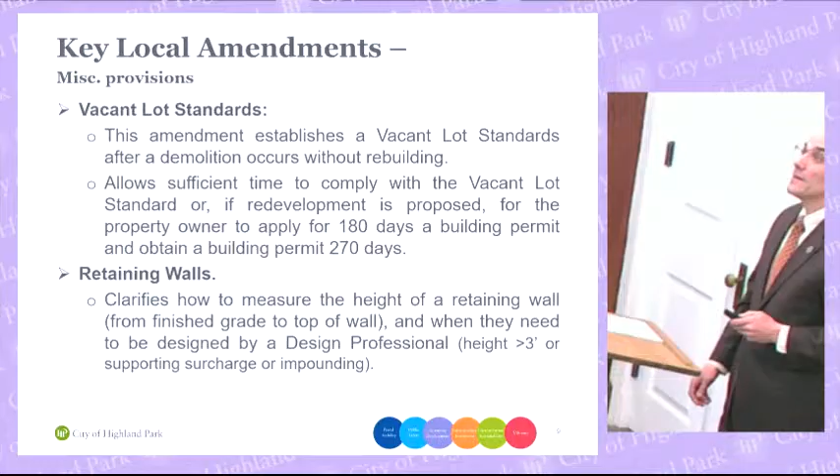Okay, elevator inspections. We're proposing aligning with state regulations that require 1 instead of 2, as our local code does, elevator inspections per year. This is in recognition of the acute shortage of qualified elevator inspectors to perform this work. Our third-party consultant, to the best of their ability, has struggled, as has previous third-party consultants. You may have read, it's in the popular news, that one of the most lucrative and in-demand professions is elevator inspectors. There's a real shortage. And the way the law is written at the state level, in the administrative code, there are only certain people that can do that. So we do not have those staff members. It is not cost effective for us to develop a person internally to do that work. They are specialists, and they are required by state law to be those qualified experts to do that. And so we're recommending that this align with state code. Other municipalities do the same. I don't view this as a problem. I just view the problem as being the acute shortage of qualified elevator inspectors. And hopefully that will change, although given the pending retirements of many, it's going to get more interesting rather than less. We'll see what the younger generation, whether they take a shine to this field or not. Hopefully they do, or at least in sufficient numbers.

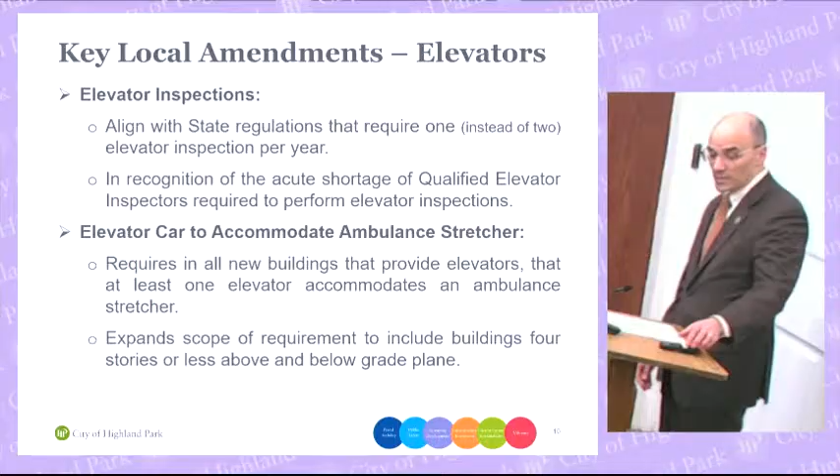Elevator car changes. We're recommending elevator cars to accommodate ambulance stretchers. So in all new buildings that provide elevators - that's the qualifier - at least one elevator that accommodates an ambulance stretcher must be provided. So it does expand the scope of the requirement to include buildings 4 stories or less above and below grade plane. So we have this need to accommodate stretchers, and it avoids fire department staff climbing stairs, lifting, and not being able to get in and out as quickly as they otherwise would be able to.

Definitions. We have made some changes to definitions to align with the model codes with regard to substantial improvement and substantial damage. These are important definitions as they drive what's required in terms of how you're addressing things when you're doing a substantial improvement or when you're addressing substantial damage. And what that means is you'll have to bring more things up to current code. This goes to fire sprinklers, etc., which we'll talk about in a moment.

We also changed the definition of recreational fire that we have. We add the fire distance requirements and allowance. In terms of the distance, we prohibit open flames to be located within 10 feet from a structure unless otherwise allowed by the manufacturer's specifications. So this is a general rule. Certain equipment, if the manufacturer has incorporated certain safety measures, can be used differently. If they have not, then the 10 feet is the rule.

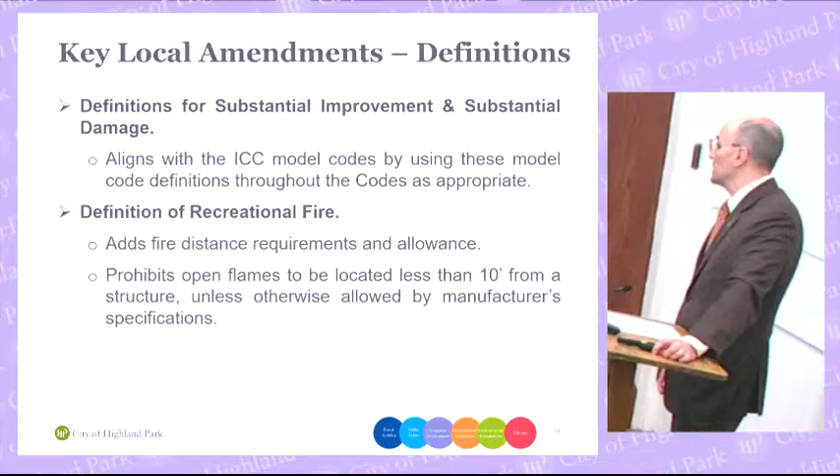Okay, sprinkler systems.

As I mentioned before, we are using the model code's definition for substantial damage and substantial improvement, and we use those as triggers for requiring automatic sprinkler systems throughout existing buildings, when an improvement is 50% or more of the market value of the structure. It's real important. So what we used to call a substantial renovation is now a substantial improvement.

We specify there are 3 exceptions to sprinklers required to be installed throughout in new buildings and additions. One is relating to a tension membrane system, or the dome, as you will, our dome. Small additions and small detached accessory structures.

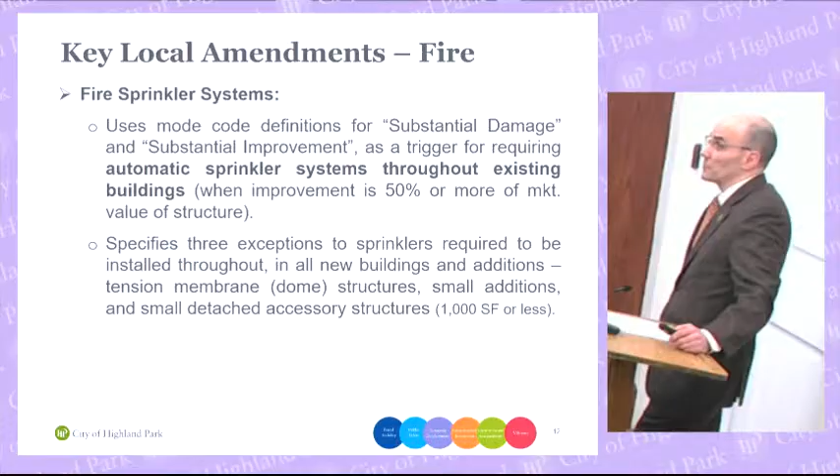Sprinkler systems are important in terms of fire and life safety and property damage reduction, and so these are important provisions. So really what we're doing is aligning with our model code from the ICC on the definitions and the 50% or more market value of the structure.

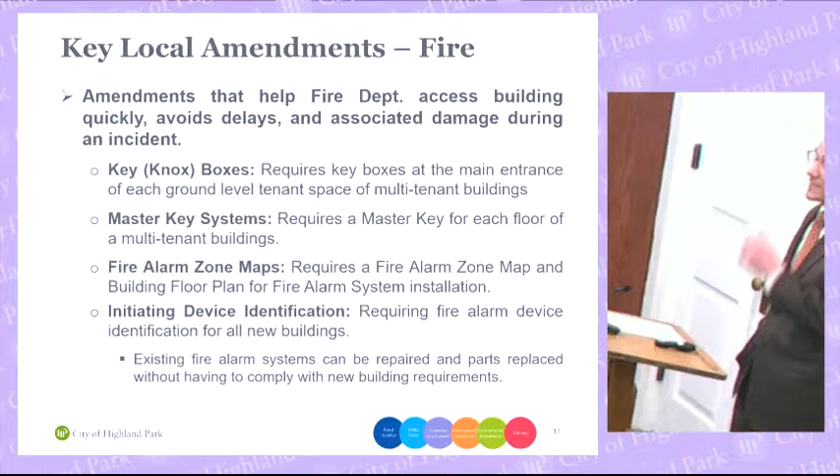There are several amendments that help the fire department access buildings quickly, avoid delays, and associated damage during an incident. So through this amendment package, we require key boxes, master key systems, fire alarm zone maps, and initiating device identification. So what is all this?

Fire department needs to get into the building quickly without bashing in the front door or side door or whatever door. So we require key boxes at the main entrance of the ground level tenant space of multi-tenant buildings.

Master key systems: we require a master key for each floor of a multi-tenant building. Fire alarm zone maps: requires a fire alarm zone map and building floor plan for fire alarm system installation. And initiating device identification: requires fire alarm device identification for all new buildings.

Together, this reduces the time it takes to address an incident. It's very important, seconds matter. So, of course, existing fire alarm systems can be repaired and parts can be replaced without having to comply with the new building requirements.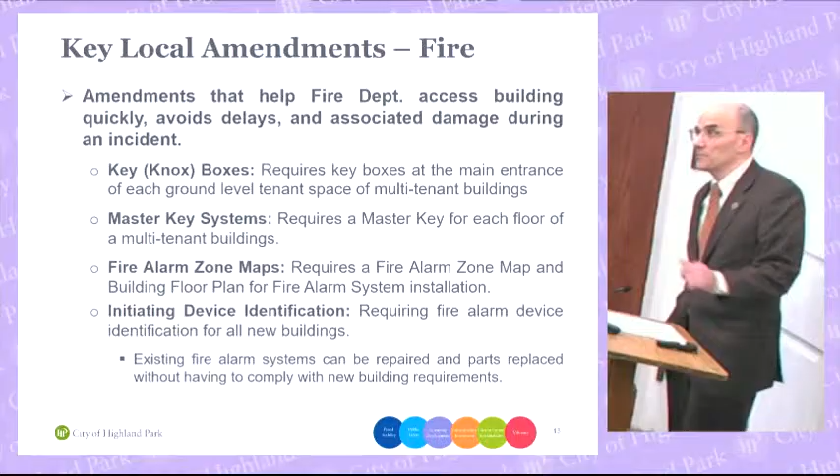Private fire hydrants: when we have private fire hydrants on properties, we're requiring them through this amendment to be visually distinguishable and identified in the same manner. So it's to paint them a certain color and such. There are various ways to deal with fire hydrants, understanding numbering systems and so forth, but this amendment talks about the actual color of the hydrant.

Energy storage systems, specifically in utility closets, basements, and storage spaces. Now, we're all very excited about going green and moving to electric in everything we do, cars, stoves, things like that, to reduce our greenhouse gas emissions. But they do pose a risk. These energy systems can store quite a bit of energy - your vehicles, and also what are called whole house battery systems, if you will, for lack of a better term.

Where they're located matters. Outside the home or away from the structure is one thing, but when they're in these locations, this amendment requires additional life safety measures be employed. It ensures that if they're installed in a building, additional measures to protect the structure and surrounding structures and properties include early detection systems, increased fire rating protection of walls, sprinklers, etc. So it's not that folks can't do them in their home or a business can't do it - it's that when they do, we need additional provisions.

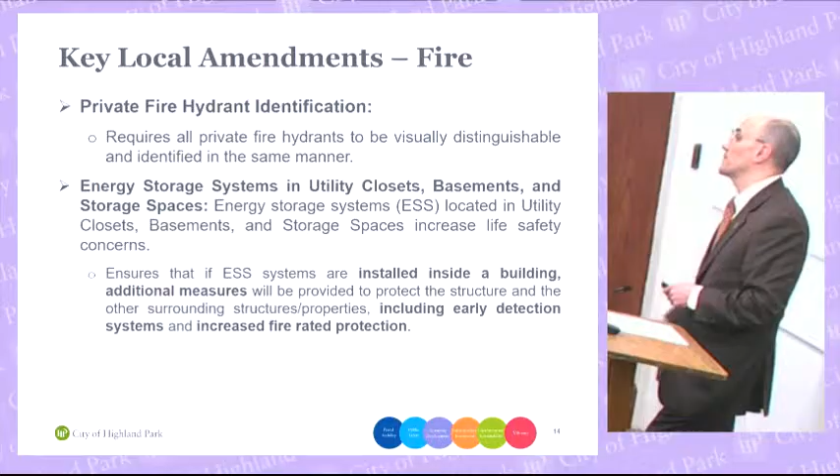It reduces the chemical reaction. The faster you can do that, the better. But these are very hard to put out. And thus we want additional safety measures so that the fire department can get there to address them before they get out of control.

Okay, local amendments in one and two family dwellings and townhouses. This is called the IRC, the International Residential Code. So what we're looking for here is a set of provisions that amend the code.

One, heat detectors. Requires affordable early fire detection in garage and mechanical rooms. These are not expensive anymore, and so we think this is a reasonable amendment and should be included.

Alarm systems require a blue lens strobe fire indicator for all townhouses. This will help firefighters easily visually identify the unit with the fire incident and reduce response time. So this is just for townhomes. We don't need the blue light for a single-family detached home. We have an address, we know where it is. Fire department, in their operations, if they're going to a townhouse development, wants to be able to roll down the street and see which unit within the building assemblies that have those townhouses are. Okay, it just, again, reduces response time.

Energy storage systems, well, we just talked about that. Those in closets, basements, and other storage spaces. In the previous slide, we talked about that.

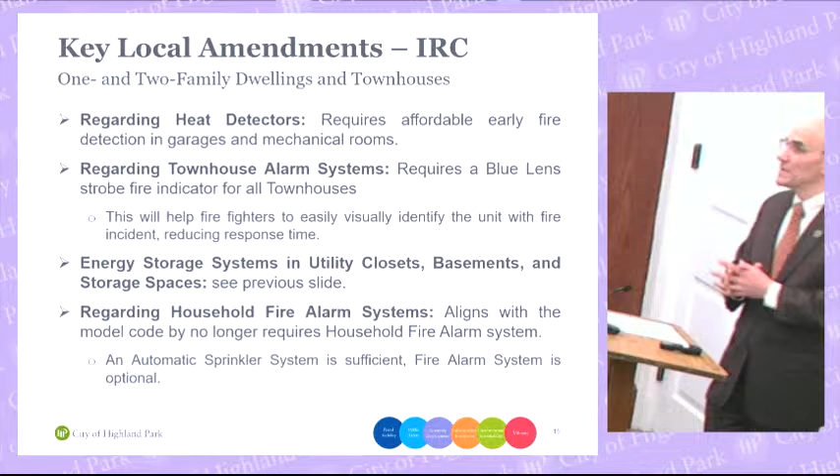Household alarm systems. Okay, this amendment aligns with the model code by no longer requiring household fire alarm systems. Chief and staff have worked long and hard. Our fire prevention staff has looked at this. Automatic fire sprinkler system is sufficient, and fire alarm system can be optional. And so all of our single-family homes are required to have, including townhouses, sprinklers. And so this is an amendment that removes that as a requirement. Doesn't stop someone from doing it, but nonetheless removes that.

Okay, so talking about additional requirements. Fire sprinkler systems. So we talk about we already require that sprinklers are included in new homes. Okay. Now we're talking about what if you do a significant improvement? Well, this amendment sets the threshold at 75% of the market value. You'd have to go through the house and do the whole house, not just the addition.

So this is important. We're largely a built-out community. We do have lots of new homes, but when you look at the portfolio of homes we have, it's a small portion. And so the fire department and life safety initiatives of local governments have a real conundrum. How do we get the existing up to the safety of today? It's lagging, right? And so this is how we propose to do it.

It's based on a significant improvement to the property. Now, unlike commercial, this is 75% of the structure's value. So if you're going to gut renovate your home, 75% of its value is your project, you're going to have to add sprinklers in. And so that will be an incremental cost. It can be like $12,000 for a 3,000 square foot home. But what it does is this is an opportunity with that much investment in a renovation to just pass that up is a real missed opportunity.

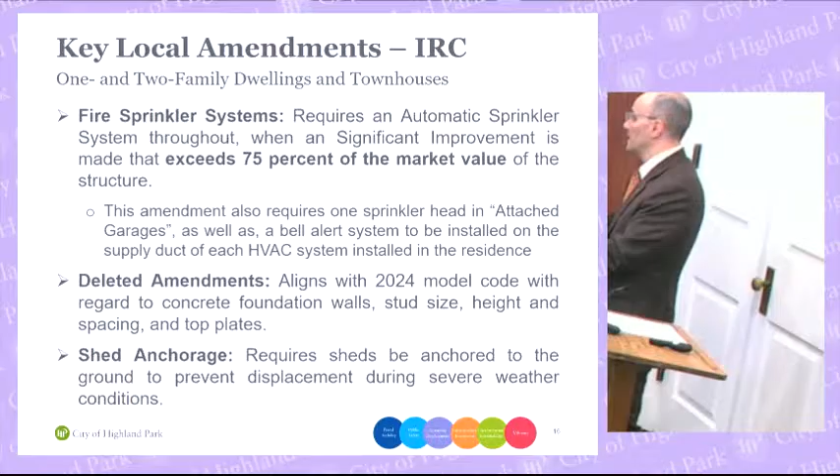And so we recommend it. Now, sheds do not need foundations. You can build a foundation, in which case you don't need the anchoring, and it will be anchored to the foundation. But where you don't, there are these screw-in anchors that you can screw into the ground. You may have seen them for tents, and you can anchor your shed down so that it won't go away.

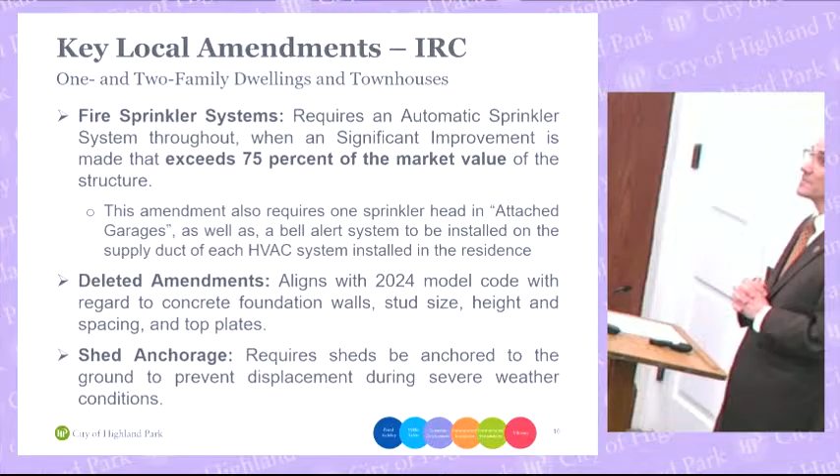Now, you say, well, when could this happen? Well, when you have really severe windstorms and, God forbid, tornadoes and other things like that. The damage caused from things flying can be tremendous, including loss of life. And so trying to keep that in a safe position there.

Okay, wiring methods. Now, we're talking about the National Electrical Code here. So we're recommending some amendments to wiring methods.

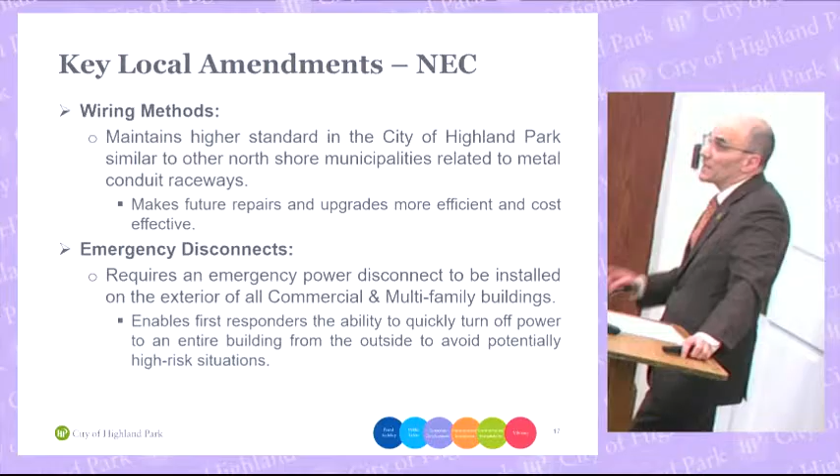Inspector Mike Bill has been a working electrician for 50 years. That's not an exaggeration. He reviewed these codes and our standards and has enforced them for the years he's been here. We recommend maintaining higher standards in City of Highland Park, similar to other North Shore communities, related to metal conduit raceways. It makes future repairs and upgrades more efficient and cost effective. We think that's in the best interest of the community, so we recommend keeping it, though it is an amendment from the model code.

Emergency disconnects. This requires an emergency power disconnect to be installed on the exterior of all commercial and multifamily buildings. So when the fire department rolls up to a situation, it enables them to quickly turn off the power to the entire building from the outside, to avoid the potential risk they face when buildings are having an incident and the power is on, and figuring out how and where to turn that off. So this again reduces response time.

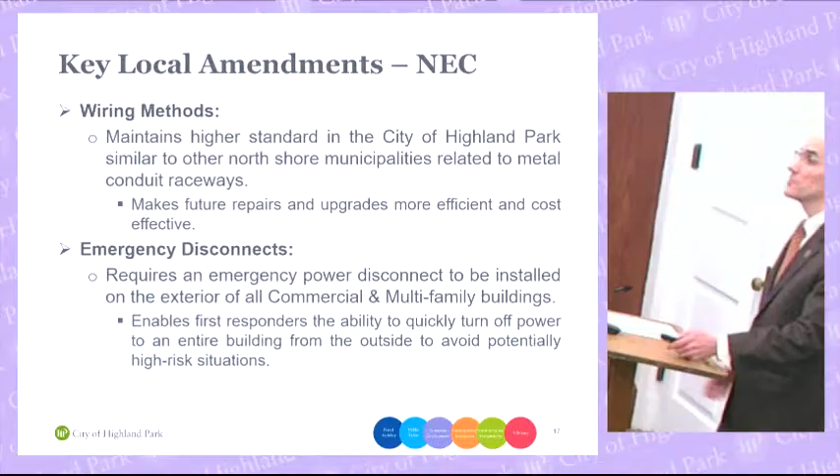Let me explain what's going on here. From an enforcement standpoint, the city is in a tough spot. There are folks very concerned about pools and pool safety abutting pools - they have little children and become acutely aware of pools as a danger. And I'll tell you, pools are a danger. It's one of the most dangerous things in a residential household, particularly with little children. Teaching adults and children how to swim as soon as possible is really recommended. However, there are other things you could do that can help, and this is one of them.

So over the years, the code has changed. This was in the model-based code a while ago, but then came lockable safety covers. Now these automatic lockable safety covers - you hit the button and it covers the pool, and great, no one could fall in, it's wonderful. But do people actually do it? There's the knowing and doing gap, right? So great, you've got this lockable pool cover, it's wonderful, but it's open. So we get the calls: oh my God, there's no one at the pool and it's open.

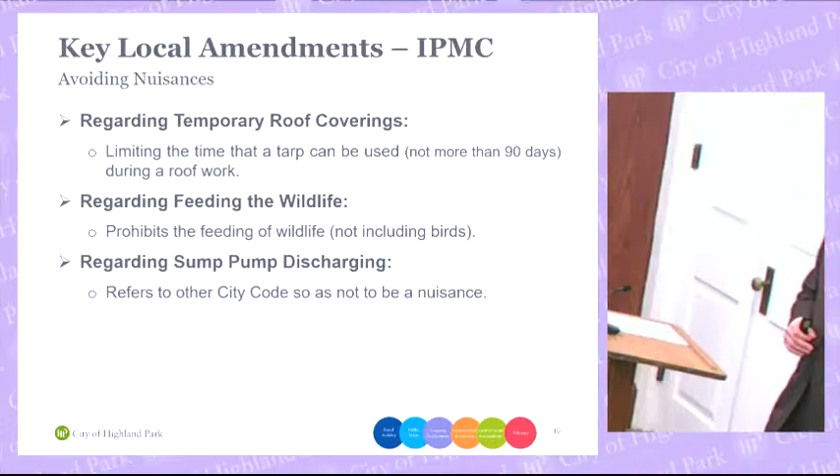Again, really trying to save those kiddos who are interested in everything from getting in the pool without someone attending it. All right, and then International Property Maintenance Code, IPMC. This is about avoiding nuisances, so there's a few amendments that we're looking at here. Temporary roof coverings, okay.

We have lots of roof permits. People are doing their roofs all the time. Sometimes people get some damage from storms. Other times they find they have a leak in their roof and they need to get a tarp on this right away. I can't get a guy just yet, fine, we get all that. It's important to be able to use a tarp.

But when it goes on for too long, it becomes a nuisance and it just is unsightly. So what we're setting here is that you can use a tarp, but not for more than 90 days during roof work. We think this is reasonable. We want some end boundary.

Now you're going to say, Joel, well, how do you know when they use the tarp? When we get the complaint, that'll be day one, that's how we know. So 90 days from that complaint. We're not running around looking for tarps. Now, if we see a tarp and drive by and it's months and months, sure. But this is more of a complaint-based system whereby people say, I got a leak, I'm putting up a tarp, great. But then they don't get a permit, and you're like, you know what, guys, it's been up for over 90 days. You need to get a permit or get this fixed.

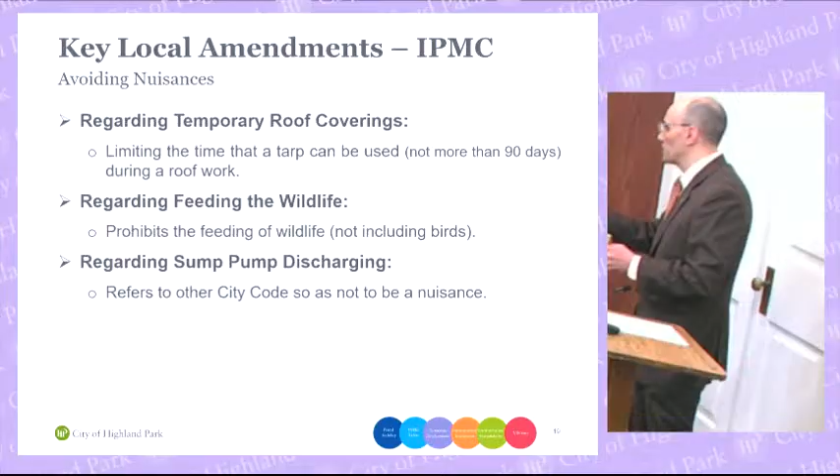So regarding feeding wildlife, we prohibit feeding wildlife, not including birds, folks. And yes, you could still have your chicken coops, the law is that's not wildlife, they're different. Okay, you could say, well, what's this about? Folks are concerned about rodents and raccoons and skunks that really get attracted to places.

Once you start feeding squirrels, even squirrels could become very aggressive, climbing in windows. Once you start feeding them, they're not pets, you do not want them in your home. And so it does become a problem for neighbors, even if you do like it.

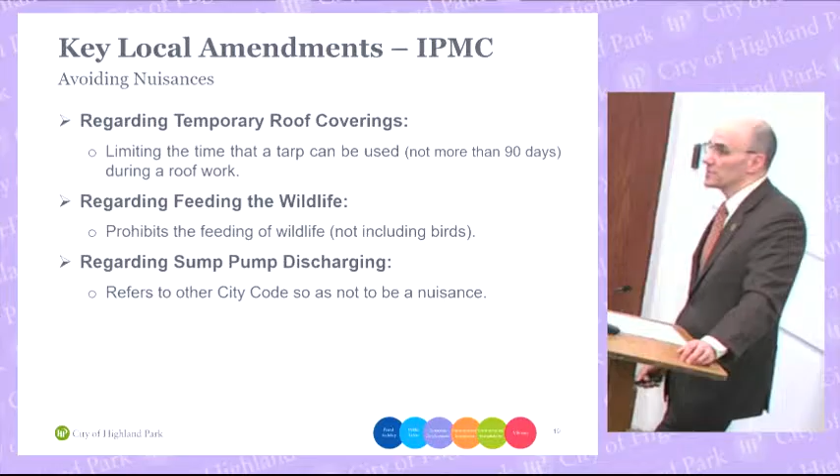Some people really do. Sump pump discharging, we're essentially referring to other city code so as not to cause a nuisance to others. Okay, next steps.

We have an adoption scheduled for council's February 23rd meeting with an effective date of March 1st. The transition to the updated code package is already underway. We've sent notices to design professionals, State Office of Capital Development, and the city clerk. General contractor license has been updated to reflect the new code, and staff has completed training in the International Code Council 2024 Code family.

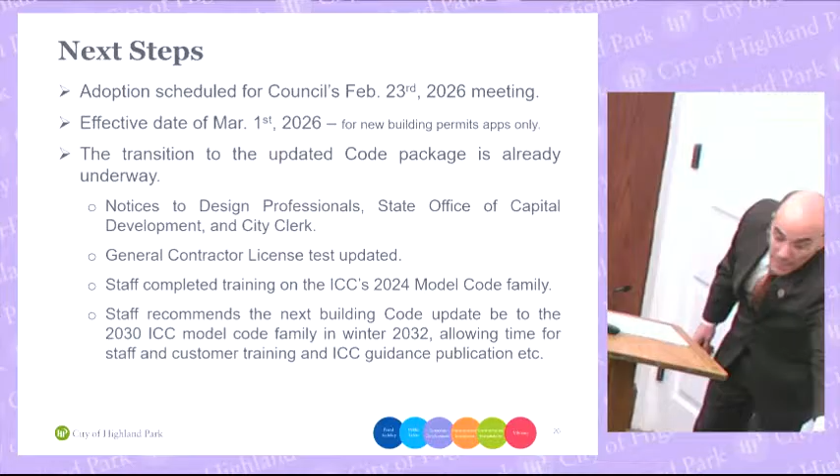As an aside, staff recommends the next building code update be to the 2030 ICC model code family in winter of 2032. This allows time for staff and customer training and ICC guidance publication. And so that's what's happened, and that's what we've done this time as well.

I was just about to thank several people. Archana Mohan Chandra is the building division manager. She headed up the building code update process, and she coordinated amongst interdepartmental staff from Public Works, Fire, as well as our own building division, inspections unit, plan review unit, and front counter unit. So we really do appreciate that effort, and it was a tremendous effort.

Chief Shaggy and his team also really appreciate the guidance you've provided and the hard work we all did with the fire prevention unit in community development, which works very closely with the fire department. Chief Shaggy, our fire official, was integrally involved in the fire code update parts of this code update. And then Public Works as well, thank you Ron, for your staff participating in this.

And that's presented to you, this code amendment, with that contribution from all those staff, and much appreciated.

That was amazing. I think we need to put that out on the internet for people to best understand why this is so important. And so I'm going to echo your thanks first to you. Well, thank you, and to Aaron, and to Archana, and to Ron, and to Joe.

This is insanely detailed and so important in terms of life safety, in terms of a healthy environment, in terms of stormwater management, in terms of getting people to invest in our community more efficiently. Because we used to have like 700 other code amendments, and people were asking how do I even build in this community. There are still a number of code amendments that aren't changing, that we're carrying over, but we've reduced that. I think this speaks to our values, our mission, both in terms of a healthier environment and giving people more safety.

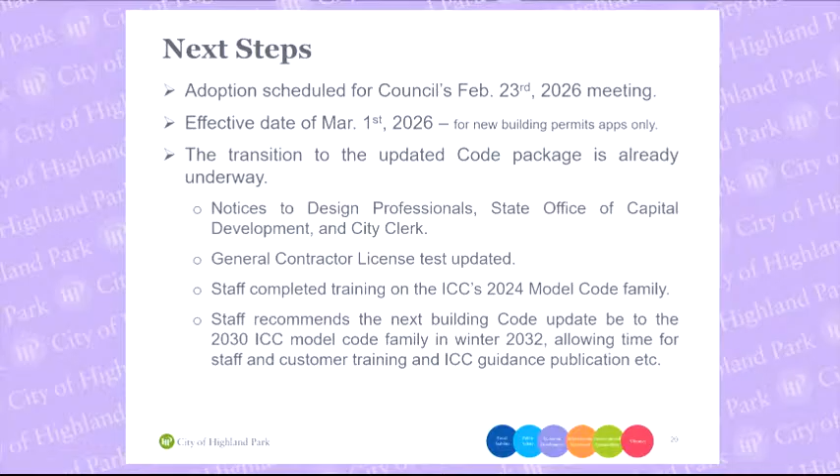It is a lot of work. Our team has been working on this - it's a multi-year project. We're in 2026 now, and we did the lion's share of the work in 25. It is not a light undertaking.

We also think the following: sometimes being cutting edge isn't always the best place to be. You don't want to get ahead of your own staff's capacity - they need time to train. This is why we're doing the 2024 code, since it's the latest cycle, but we're adopting it in '26 so we've had some time to train.

If you do it right away, it's like - what's going on? Everyone's not really knowing what they're doing. So we need to build capacity.

You also want not just your own staff, but the design professional community to build capacity too, because that's who we're reviewing the work with. If it's a mess, it just slows permitting down - it really becomes a real grind.

That's why we do it when we believe is necessary. We do this to stay aligned with ISO and make sure we don't get penalized from an ISO perspective. This is important to adopt because we need to do this by March so we don't have any ISO impact - that's the standard. So that's why we do it on this type of cycle as opposed to every 3 years - it's very, very arduous to do it every 3 years.

Thank you. And then just one more quick question - when we look at some of the local changes we've made in Highland Park, do you also consult with neighboring suburbs? Like have you looked at Deerfield or Glencoe?